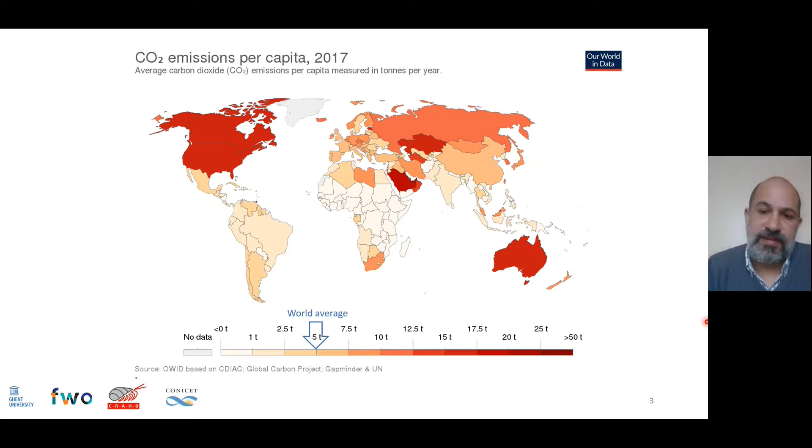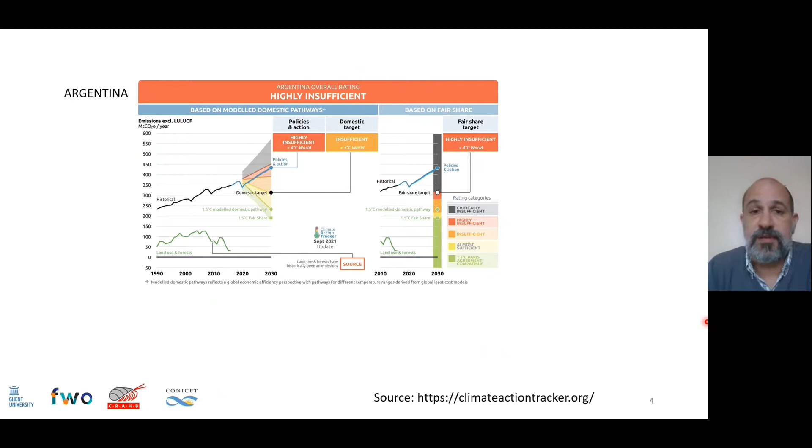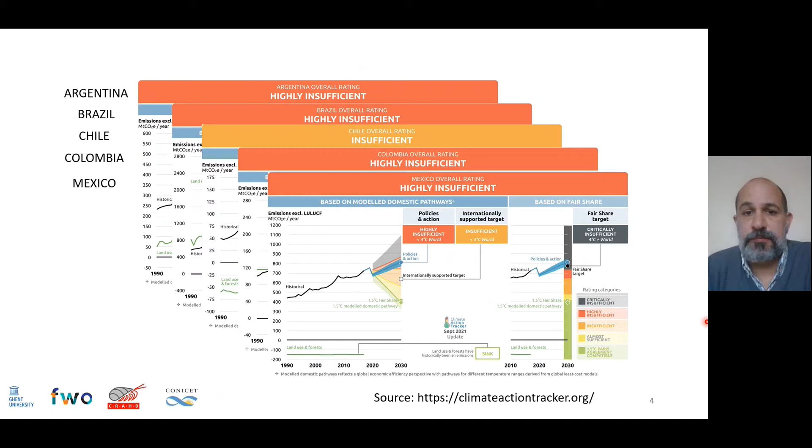But this does not mean that the national governments in Latin America have not committed to reducing their carbon footprint. The problem is that the national targets and the path towards these targets is not going very well, and currently more efforts are necessary for almost all countries in Latin America: Argentina, Brazil, Chile, Colombia, Mexico, and I could continue with other countries. So additional efforts are necessary in the different industries.

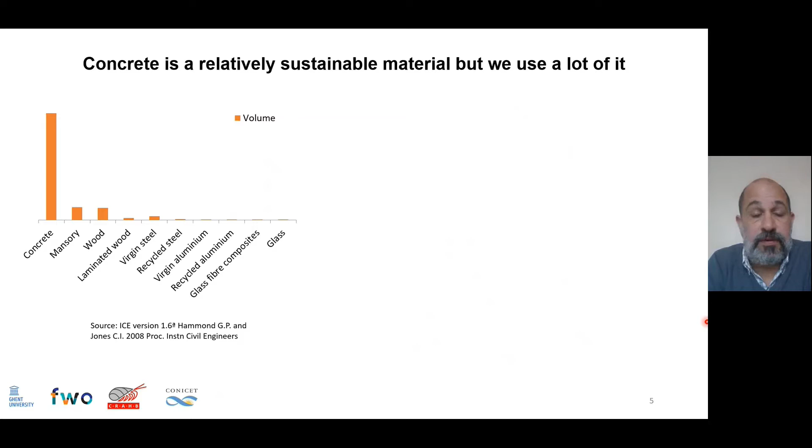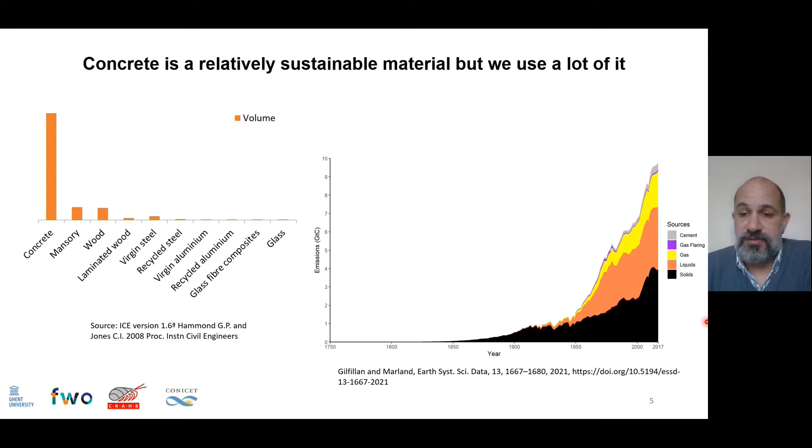Concrete, as you might know, is a relatively sustainable material. The specific carbon footprint and embodied energy of concrete is much lower than many other materials. The problem is that we use very significant amounts of concrete, and therefore the cement and concrete industry has a very significant carbon footprint. After all fossil fuels, the cement industry is the one contributing to anthropogenic CO2 emissions. So we need to do something about it.

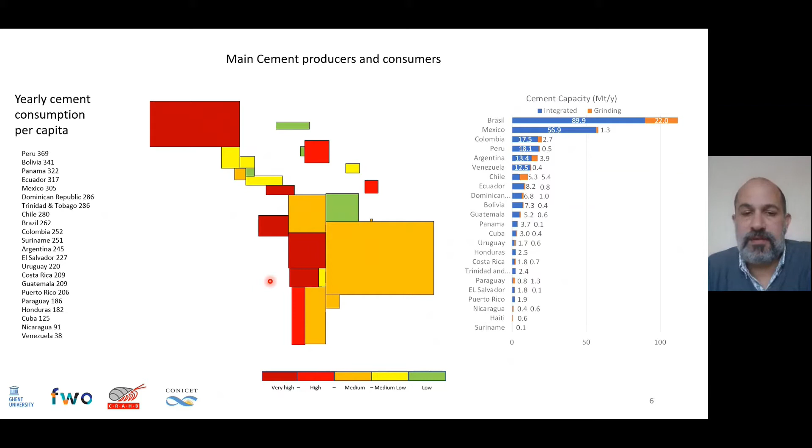So we had to put some attention when we consider the carbon footprint of the industry in a region where, for example, the countries on the Pacific coast many times import cement from Asia when the demand has some peaks due to the increase in construction works.

These peaks have been occurring now that the pandemic is literally fading, and we can see variations between 2020 and 2021, very significant variations, for example, for Argentina and Peru, with 24% and 40% increase in cement demand.

And also Brazil, Chile, and Colombia. We can see that for the cases of Argentina and Colombia, for example, the increase in demand is mostly for cement in bulk. This is connected to the type of use that this cement is having in large-scale works and large projects for housing.

But in other countries, Brazil, Chile, and Peru, for example, most of the increase in cement demand is in cement in bags, and this is due to the fact that it's used in applications that are not so massive, such as self-construction and real estate or private works. These two different forms of delivery have significant implications regarding the efficiency of the use of cement. This is something we need to pay attention to also when we want to reduce the carbon footprint of the industry.

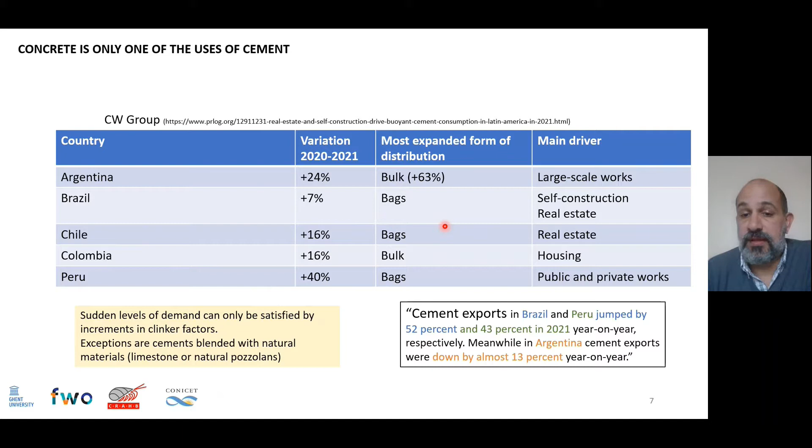Sudden increments in the level of demand, such as the ones I'm showing here, are hardly satisfied by some supplementary cementitious materials. When we have an increase in demand, we can easily produce more clinker or mill more limestone or natural pozzolans, but for blended cements containing slag or fly ash, it's more difficult to find sources of these SCMs so as to maintain the clinker factor at the same level. So peaks in demand normally result in peaks in the value of the clinker factor.

Regarding the ratio between cement in bags and cement in bulk, when we see Latin America as a whole, we notice that the amount of cement in bags is much higher in relative terms compared with other regions. This is the general trend worldwide, but for the average GDP per capita of Latin America, the amount of cement in bags should be much lower. This is connected to the social structure in Latin America, where social and economic inequality is much higher than in other regions.

This also affects the carbon footprint of the industry by increasing the demand for cement and concrete due to inefficient use of the materials.

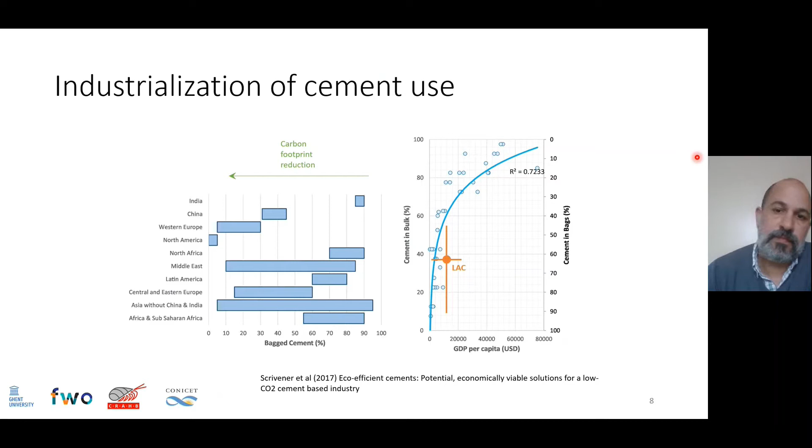But that's when we watch the region as a whole; in the different countries there is some contrast. We have the case of Brazil, the main producer and consumer in the region by far, where the ratio between cement in bags and in bulk is pretty similar to the average of the region. But then we have countries such as Chile, where 60% of the cement is consumed in bulk, and on the other extreme countries like Guatemala, where only 20% of the cement is consumed in bulk. So the approach to reduce the carbon footprint and make more efficient use of cement and concrete should also account for the differences in development degrees across Latin American countries.

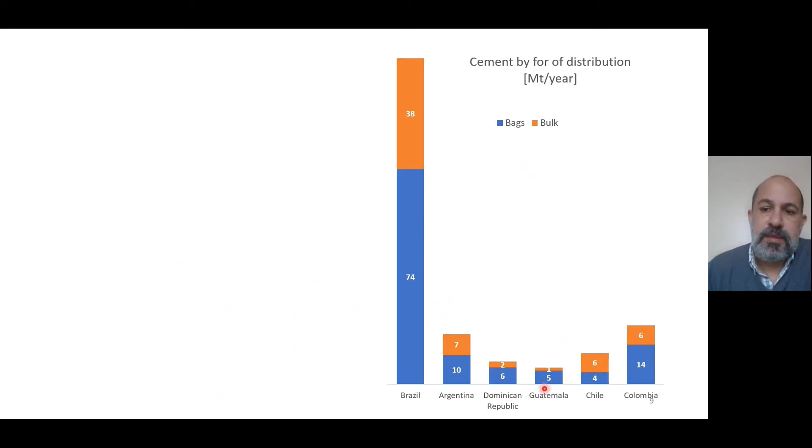This is important regarding the efficiency in the use of cement and concrete, because the use of bag cement has been demonstrated not to be as efficient, and normally significant volumes of waste are produced. For bag cement, for example, we may need up to 2 times the amount of cement for the same application in which we could apply ready-mix concrete, which normally produces waste between 10 and 20% of the material actually used in the structure.

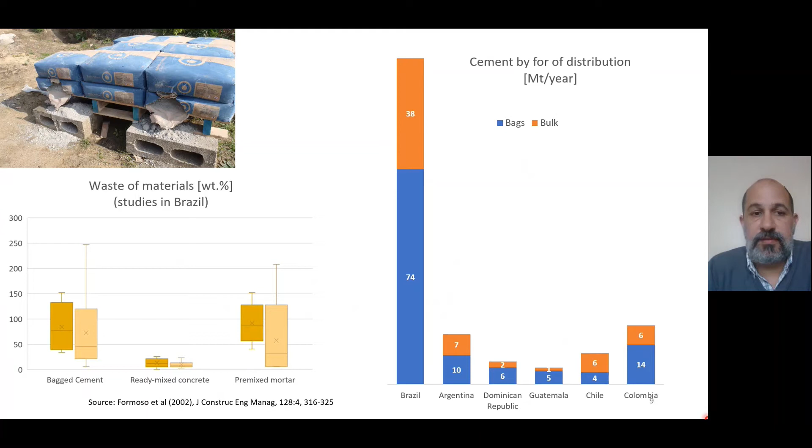Similar figures to those of bagged cement apply to premixed mortar. This can be very much improved with better training of the users. But moving towards industrialization in the cement and concrete industry can effectively improve these waste production values, making better and more efficient use of cement and concrete.

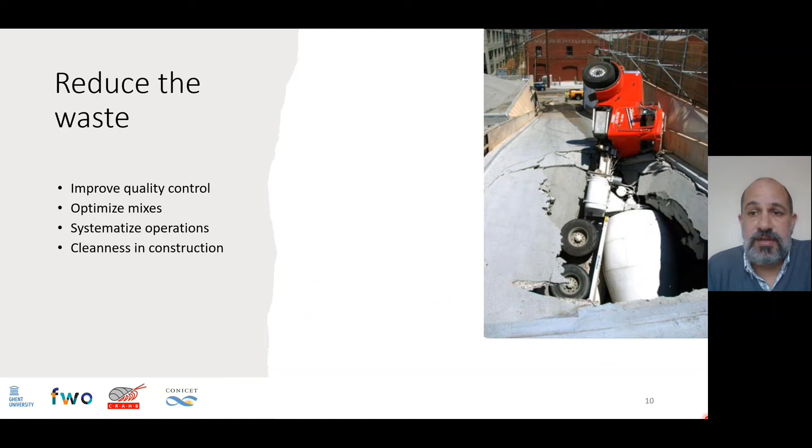So reducing waste can be achieved by improving quality control and also by optimizing mixes. There is a very recent rock talk by Doug Hooton that is very interesting and recommendable, about using superplasticizers and optimizing the skeleton of aggregates so we can use less cement in mixes. Also, the systematization of operations and maintaining cleanliness in construction can help reduce waste and the carbon footprint of the industry.

Another strategy very much suitable for the Latin American market is increasing the proportion of the precast industry in construction. When we compare precast to on-site concrete, the first thing we notice is that we need more clinker in cement and more cement in concrete to produce precast elements. This is due to the need for faster strength development than concrete on site.

But on the other hand, the systematization of production and quality control can achieve lower levels of waste production and more efficient use of material, especially regarding the performance of structures constructed by precast, which is much higher in general terms than construction on site.

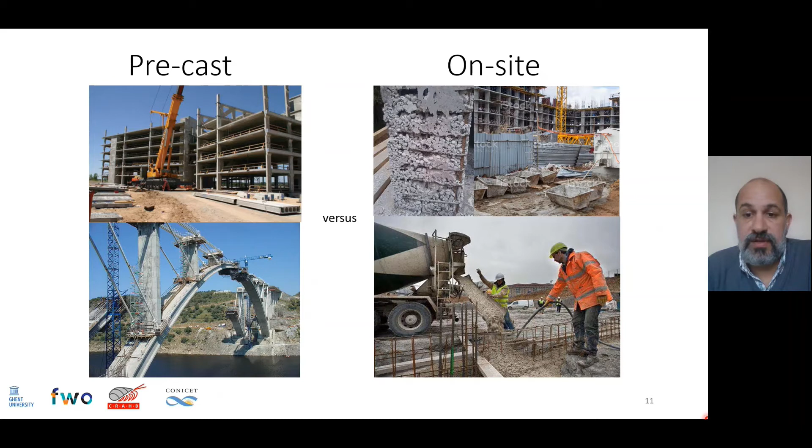Of course, some types of works will always be made on site, but when we talk about reinforced concrete, we observe significant defects in on-site construction that are generally more difficult to avoid than in the precast industry. So increasing the proportion of the precast industry can certainly achieve more efficient rates in the use of cement and concrete.

A similar increase in efficiency can be achieved by increasing the strength class for concrete. Let's take this example: a column made with concrete of strength class 25 megapascals would need half a cubic meter to resist 340 tons. But if we increase to 40 megapascals, we can reduce the volume of the column by 37%, and also the dead load by 37%.

This means we will need less cement for constructing the same structure, the same column, for the purpose of resisting these 340 tons. And in Latin America, most national regulations still contain slightly outdated values for the specified compressive strength of structures, making it less efficient and not pushing the market into a more efficient use of cement and concrete, which is really needed these days.

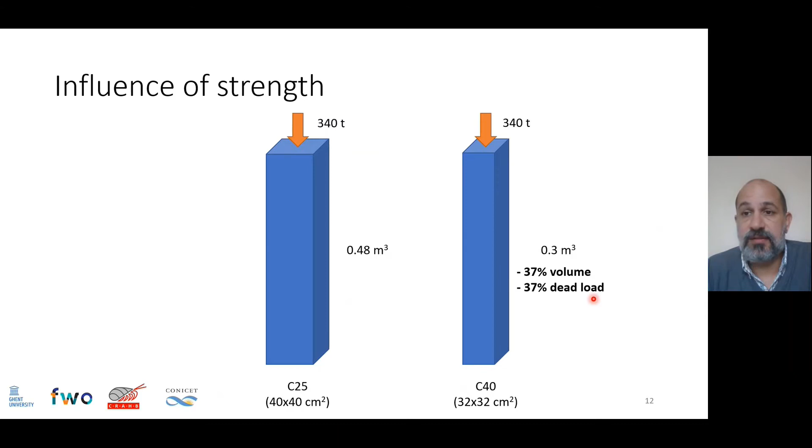Here we can also see the effect of strength on relative economic costs. This is an estimation for Argentina, where as we increase the compressive strength from 20 megapascals to 50 megapascals, the cost per cubic meter increases, but when we consider it per ton of load that this concrete will be resisting, we notice a reduction in costs. So increasing the strength level of concrete in structures is not only beneficial for sustainability, but also for the economy of construction.

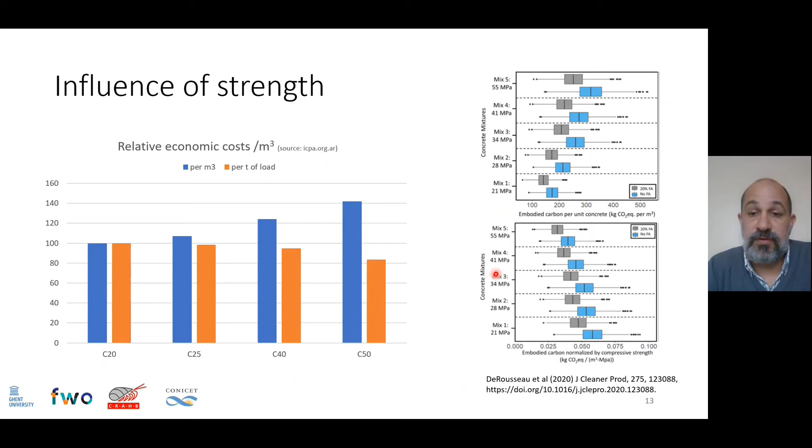Here we see an investigation from DeRousseau and co-authors, in which, when they design concrete, conventional or with fly ash, for a higher compressive strength, we have a larger embodied carbon per cubic meter of concrete because we need more cement. But when we compute the embodied carbon normalized by compressive strength, we observe that the lower compressive strengths are the mixes that have the largest embodied carbon. So again, this shows how moving towards higher compressive strengths can help achieve more efficient use of cement and concrete.

So by introducing this penalty, concrete produced without quality control became more expensive because cement content was increased to meet this strength target, and then the implementation of quality control systems became more competitive in the industry.

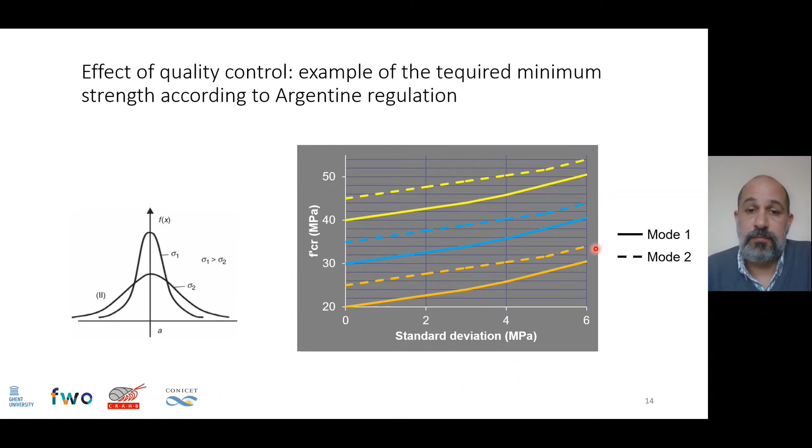But of course, we are very much used to producing this paste as a mix of cement and water, but we can use several other materials, especially fillers, that can fill the spaces and voids between aggregate particles and help achieve the required workability without so much carbon footprint, because in fact we don't need the reactivity of the clinker for producing these workable mixes.

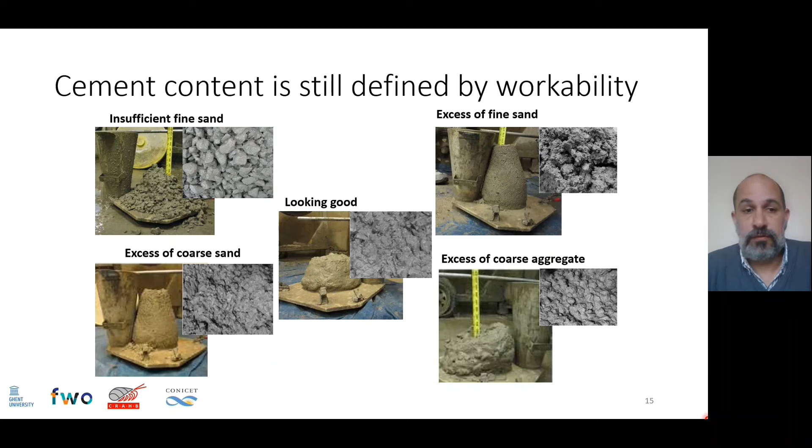We need the reactivity of the clinker for strength reasons. So if we can solve the particle distribution in a way that we have fewer voids, we will require less cement.

There's very interesting work done by the group of Vanderley John in the last decade on the use of binder intensity and how to optimize it for compressive strength by working on the packing of particles, not only the aggregates, but also the fines. By using fillers, they have demonstrated that we can obtain compressive strengths of 60 megapascals or higher with only 250 kilograms per cubic meter of cement. This can effectively reduce the carbon footprint of concrete, not only in Latin America, but also worldwide.

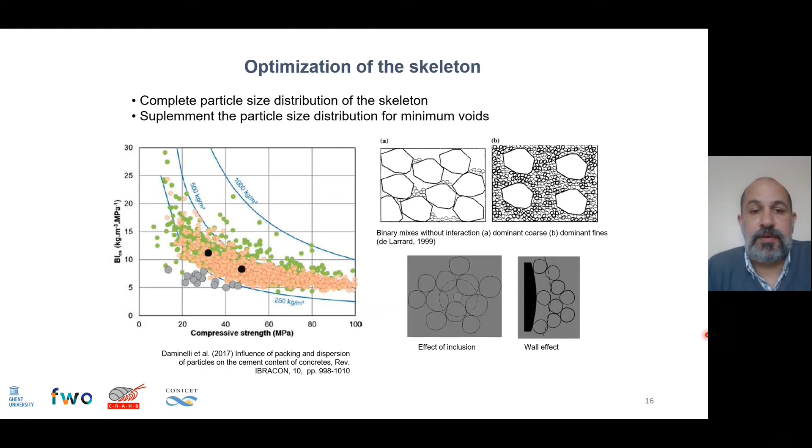In Latin America, the use of SCMs is pretty much generalized. The most significant mineral admixture used in Latin America is limestone, followed by natural pozzolans, slag, and fly ash.

Since 2005, the replacement ratios of clinker in cement were maintained more or less steadily. These replacement ratios are slightly higher than in other regions, even Europe, where replacement ratios are not as high as in Latin America. This is mostly thanks to the widespread availability of natural pozzolans, because these are very reactive supplementary cementitious materials, not always, but the pozzolans used in cement are, and then higher percentages of clinker can be replaced in cement.

Nowadays, the Latin American industry has achieved a specific emission of 808 kilograms of CO2 per ton of clinker, and due to high replacement ratios, the emission of cement is 574 kilograms of CO2 per ton. Also, thermal energy consumption has been improving during the last years, with more use of alternative fossil and mixed wastes, and also biomass. But of course, there's a long way to go so we can achieve carbon neutrality in 2050.

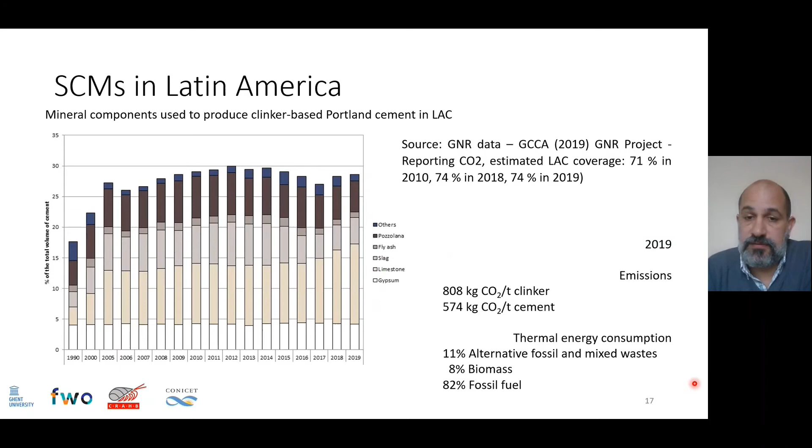When we look at the different SCMs used in different countries in Latin America, this cannot be generalized homogeneously for all regions. We have countries such as Argentina, Brazil, and Colombia, in which limestone is the main mineral admixture used for blending cement, followed by slag.

And then we have a group of Andean countries such as Bolivia and Ecuador, in which natural pozzolans are highly used, up to 30% of the total cement production.

We have Mexico as a special case, in which limestone and natural pozzolans are quite evenly used, but not in as high percentages as in other countries. And here the clinker factor is slightly higher than in the rest of the region.

The same happens for Peru, which has one of the highest clinker factors in the region.

Chile is another special case. It's the only country where fly ash has a significant participation as SCM in cement. Maybe it's only comparable to Brazil, with 2% of the total cement production.

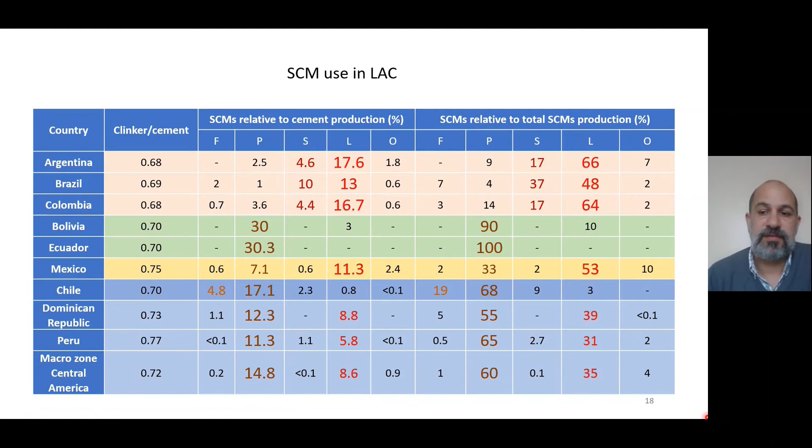So we can divide the region into several groups in which limestone, slag, and natural pozzolans are the dominant SCMs. This is based not only on the geography of the different countries, but also on the specific productive structure, whether they have a steel industry or not.

We can also classify the different countries according to their standards. Each country has a national standard, but these can be roughly grouped into two. A group of countries that take European standards as main reference, which normally have a prescriptive approach in which the maximum amount of supplementary cementitious materials is mentioned in the standards, and another group mostly based on ASTM standards, which have a performance-based approach. In this case, there's no maximum limitation for the SCM that can be incorporated in the cement.

In these countries we have Colombia, Ecuador, El Salvador, Guatemala, Peru, Panama - so most of Central America and also the Pacific coast in South America.

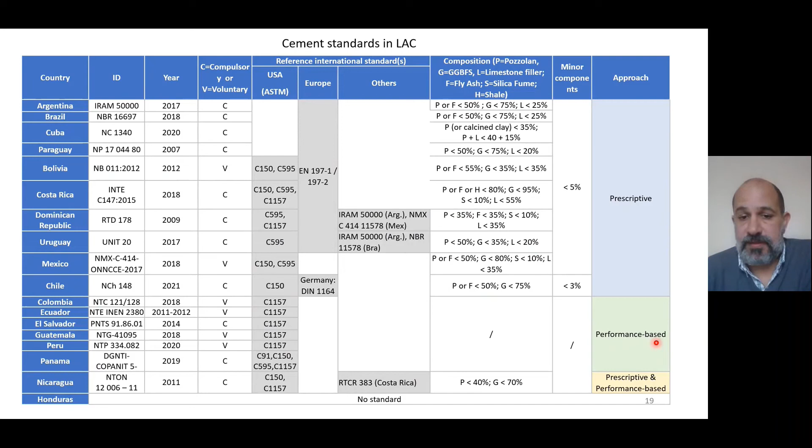But these two approaches do not correlate completely with the clinker factor we have in the different countries. So if we take, for example, the case of Peru - I was mentioning earlier that Peru has the highest clinker factor, but still a performance-based approach. So it seems there are other limitations to the clinker factor than the regulation itself.

So with this scenario, FICEM has built a strategy towards carbon neutrality in 2050, relying heavily on reducing clinker factor. But for achieving a more efficient reduction of clinker factors, segmentation of the market seems necessary. Applications of cement in ready-mix concrete and precast will not allow as significant reductions in the clinker factor as applications in bag cement and mortar.

Screed and others that have no significant requirements as for performance, in which the clinker factor may have reductions up to 0.4. So this segmentation of the market would allow us to achieve even lower clinker factors for the whole industry, and also reduction in the proportion in which bag cement is used. As I mentioned earlier, it's a rather inefficient use of cement, and this can also contribute additional carbon savings.

So the scenario for 2050 is that cement demand in the region will be 227 million tons, with an overall clinker factor of 0.51. This means we will need 115 million tons of clinker being produced and 111 million tons of SCMs being used. This represents a 65% increase in comparison with the current consumption of SCMs of 67 million tons.

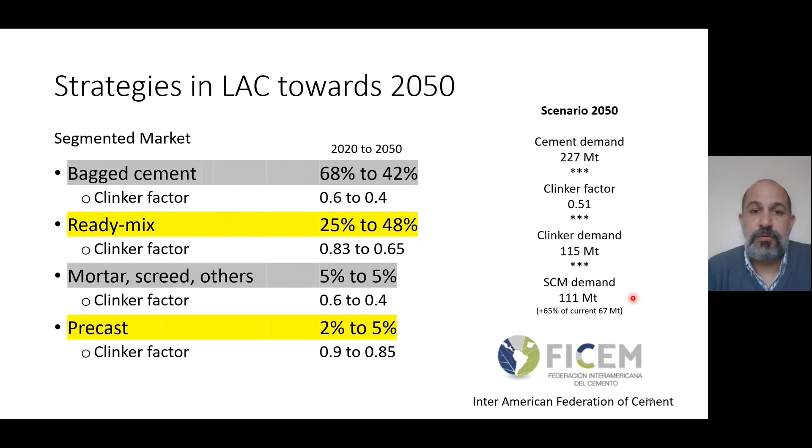So we really need to look for sources of SCMs to satisfy this future demand. And we have some promising SCMs in the region. The first of all is natural pozzolans, which is available in sufficient quantities in several countries, mostly the Andean region and also Central America. But we have some barriers for their application, and the main one is geography, because the location of these natural pozzolans in many cases is quite far from the centers of consumption.

So this makes these natural pozzolans less competitive as supplementary cementitious materials.

Calcined clay is also a possibility for almost all Latin America, and this has already been applied in Brazil for quite some years. Now in Argentina and Cuba we have cements with calcined clays, and there are pilot projects in Colombia and Guatemala.

At the moment, the main barrier seems to be the regulation and the acceptance by users. One limitation is, for example, the color that doesn't look so gray as the conventional cement.

Limestone is a mineral admixture that could increase the participation in some countries such as Bolivia, Chile, Peru, and Ecuador, where the regulation is still maintaining the level of usage quite low.

So with the levers that I was explaining so far, the FICEM, the Inter-American Federation of Cement, has constructed this road to net zero emissions in 2050. And all the strategies I explained reach their maximum more or less in 2030.

And from there on, only carbon capture technologies will allow further reduction of the carbon footprint of the cement and concrete industry. A problem for the Latin American market in implementing these technologies is their cost.

So moving forward into carbon capture technologies that are currently available would really increase the cost of construction in the region and reduce the competitiveness of cementitious materials.

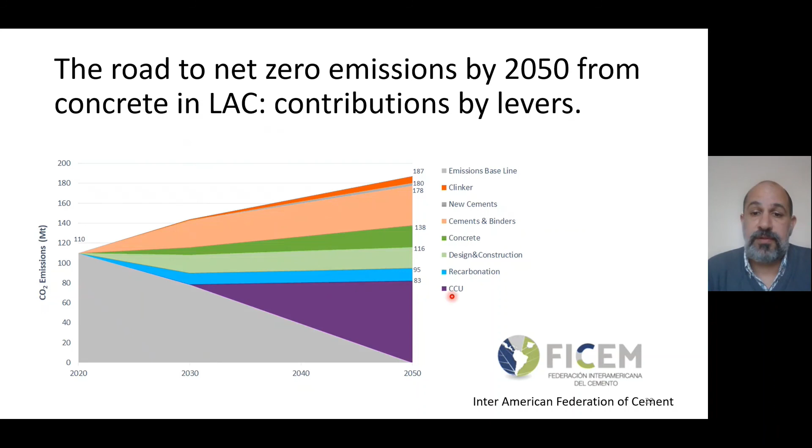So we need to further investigate these technologies to make them more affordable and more according to the capacities of the Latin American region.

So to conclude, I would like to point out the inequalities that still persist in Latin America, and the strategies to reduce carbon emissions should take into account that the investment needs for these carbon reductions should not collide with human development needs. So in most cases, only low-cost strategies can be applied, at least in the short term.

For the reduction of clinker factors, this already seems possible in some countries with more use of natural pozzolans or limestone. But we need to pay attention to the education of users in these new cements.

Because in the past, imperfect application of these new cements, or some early pathological signs due to bad use of new cements, have brought bad reputation to them. So the market has been more resistant to incorporating new technologies due to these reasons.

Quality control is an important tool for reducing the carbon footprint of the concrete industry. We have to pay attention to full compliance with strength and especially durability requirements, so we have efficient use of cement and a reduction in carbon footprint with more industrialized means of production.

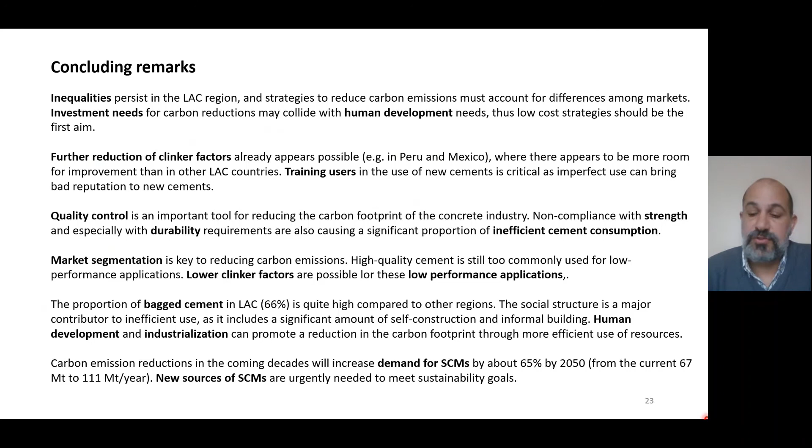The carbon emissions reduction in the coming decades will increase the demand of SCMs by about 65%, and for this, new sources of SCMs are urgently needed to meet the sustainability goals.